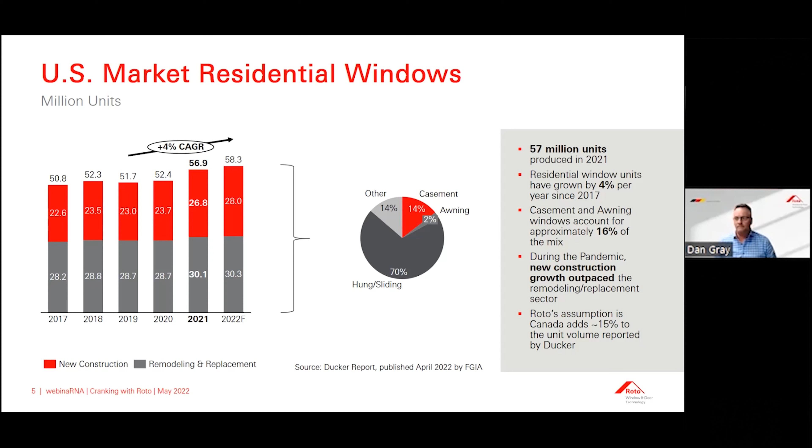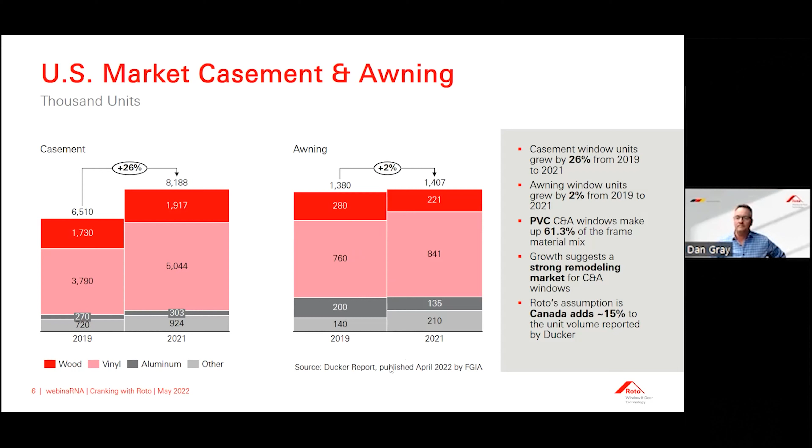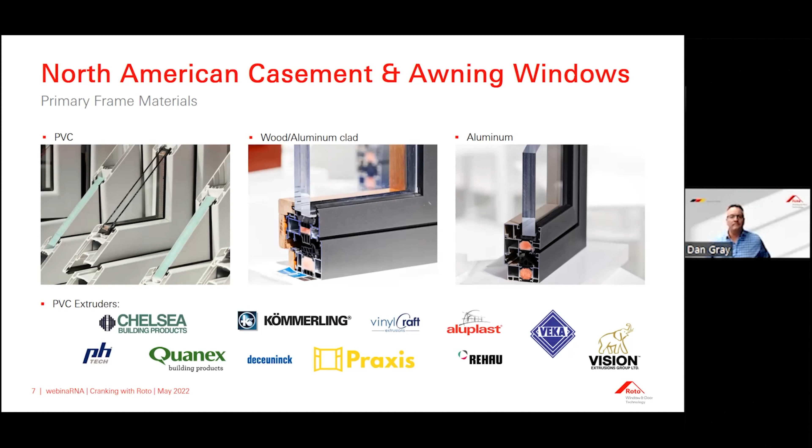First of all, as we know, taller, wider, and heavier casement and awning windows are the theme. These larger units require robust and innovative hardware solutions.

Energy performance standards are becoming much more rigorous today, which leads into an increase in triple glazing. All of this ties into size and weight of the units overall.

Even though the units are getting bigger, the ease of functionality remains. There's a lot of focus on ADA requirements to maintain operating forces at 5 pounds or less. This becomes a challenge for all parties.

The hardware is becoming more contemporary overall. Somewhat gone are the days of the rounded style of hardware. Now you see much more squared off right angles.

And tying in with that is the color palette. I think we've all experienced that black is really in today when you look at windows. And actually, even shades of brass and gold are making a huge comeback.

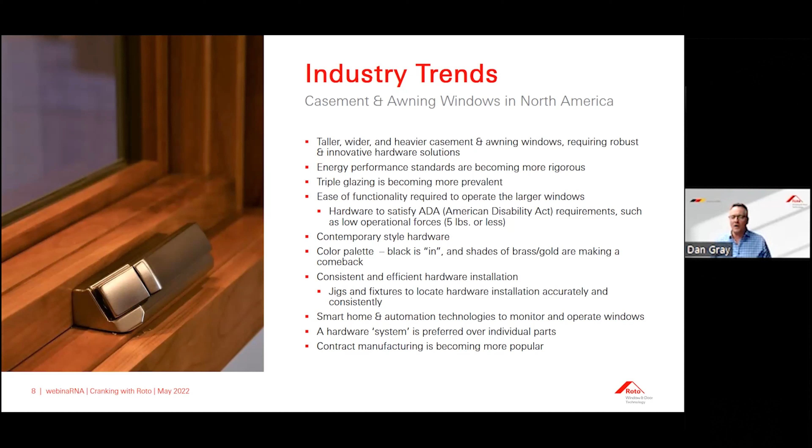Now we're going to take a look at Roto. Who is Roto overall? Parent company Roto Frank, founded in Stuttgart, Germany in 1935. Wilhelm Frank, the founder, invented the hardware to actuate a tilt and turn window.

In Europe, a tilt and turn window is analogous to our single and double hung windows here in North America. There is tremendous engineering and robust supply chain capacities and capabilities on a global scale within the Roto Group. We have some 14 manufacturing sites around the globe, strategically located.

We looked at the sliding patio door market segment throughout North America, and the Inowa hardware was a focus in that particular webinar. A recording of that can be seen also on Roto North America's YouTube channel.

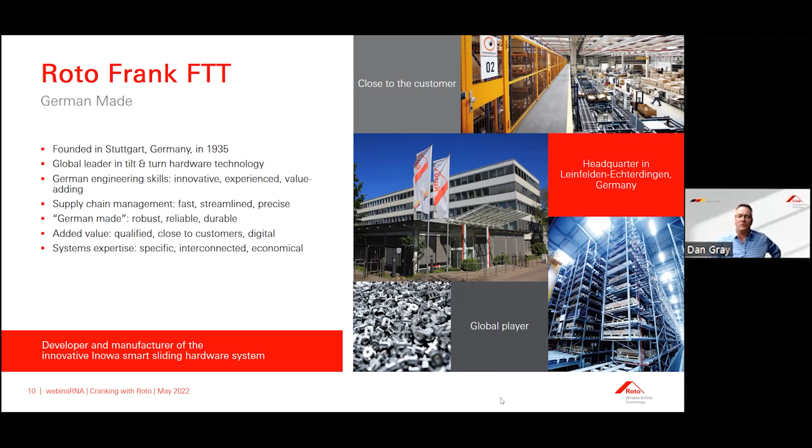Now let's hone in on Roto North America. We were founded here in North America in 1979 with our facility in Chester, Connecticut. Over the years, some evolution took place. And starting in about 2004, 2005, the primary focus became window and door hardware.

In 2012, we made a significant acquisition of Fasco die-cast metals in Mississauga, Canada. This came at a time when it cemented Roto's commitment to the North American market.

Today, we have three core product groups. First one is casement and awning, which we're going to talk a lot about today. The second, sliding patio door—again, that was the theme of our first webinar series in February.

And then tilt and turn windows and the entire Euro product category, which will be a focus item of an upcoming webinar series later this year. Overall, we strive to offer excellence in window and door hardware to our customers throughout the United States and Canada.

Let's take a look into our mission here in North America. We conduct regular surveys and discussions with our customers. We want to understand what our customers value for purchasing criteria when they make a determination who they're going to do business with.

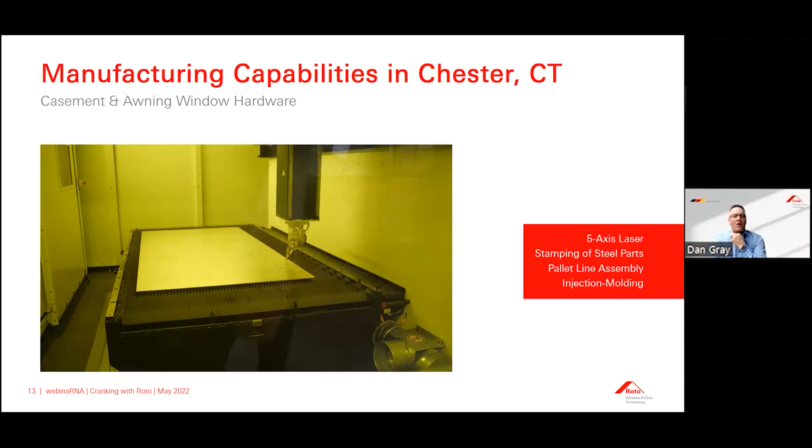First of all, this is one of our 5-axis lasers, cutting arms for our operators. Here we have a stamping machine, at this point cutting arms for our HGO5 hinge. This is one of our pallet lines where we're applying a silicone bead to our operator to connect the base and the cover.

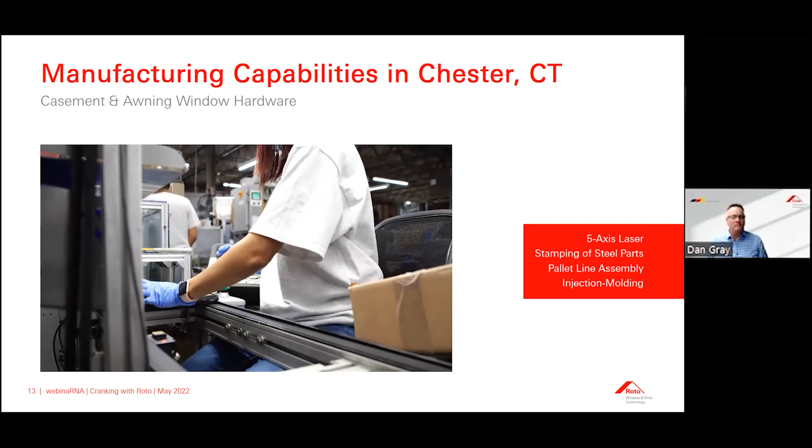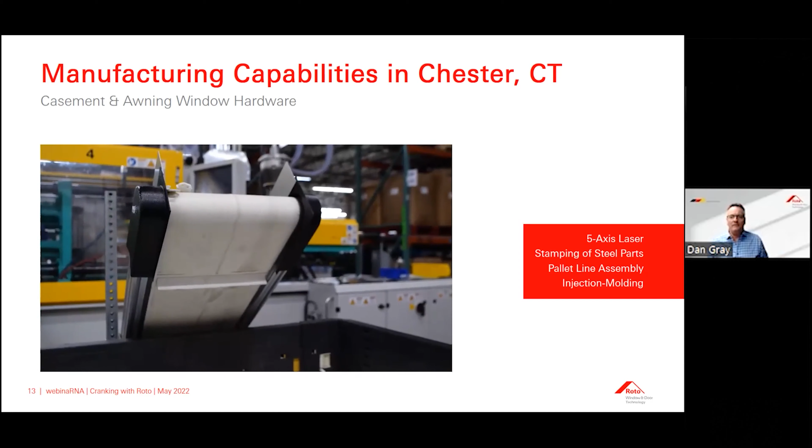Next, we do a fair amount of injection molded parts here. For example, all of the guide housings and the strikers for our casement program are done here. Our sash lifter, a popular device, is injection molded in-house. And then with our lock bars, after they've been powder coat painted, we do a flatness check to make sure the bowing does not exceed standard expectations of our customers. That's a quick snapshot of some of the manufacturing capabilities we have in Connecticut.

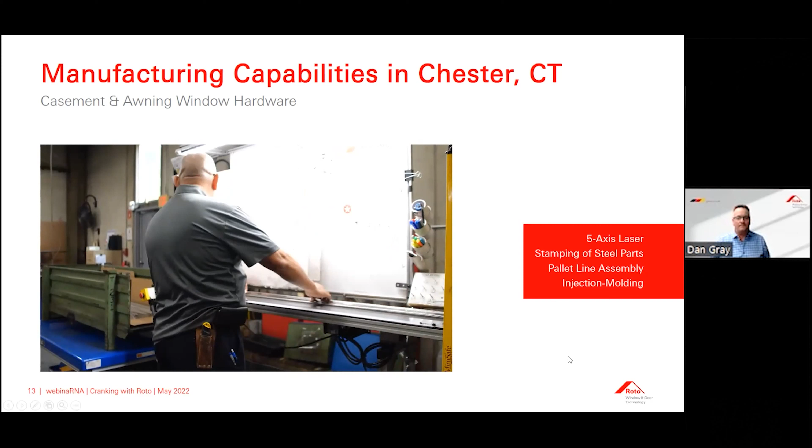Now we're going to shift a little bit and take a deeper look into some of the products that comprise our casement and awning portfolio. First of all, there's 3 subcategories, as I mentioned at the start. In order to optimize the fit, form, and function for a casement and awning window, putting these 3 subcategories in unison does tremendous benefit for the fabricator and their customers once the window is installed in the field.

First subcategory, or the engine if you will, are the operators. Roto has a myriad of operator styles that we'll take a closer look at. And the locking system—fantastic opportunity to separate one's window performance from their competition through the utilization of an optional part called the casement corner drive, which we'll look further into. Then finally, the hinges. Nobody really cares too much about the hinges until there's a problem; it tends to be an undervalued component within the hardware system. But we'll delve into some of the options we have on the hinge subcategory.

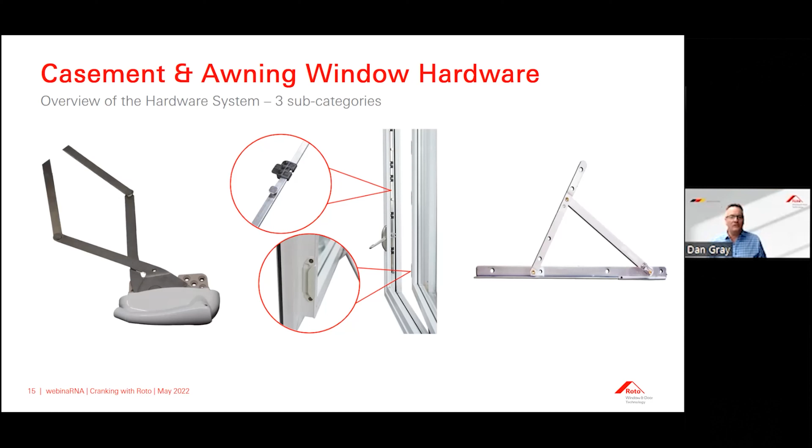So let's take a look at the xdrive OP06 operating system. This is our first generation operator. It was designed and began to be manufactured here in Connecticut in 2006. This is a very narrow footprint of an operator, and it's a fully sealed housing, so it does not require the addition of a cover cap. Yes, of course, you can add cover caps and multiple crank handles, as shown to the right, but the cover cap is not required, which gives a customer, perhaps one focused on new construction, the ability to have a just-right product.

The OP06 is available in cold roll steel or 300 series stainless steel for a complete coastal package. As I mentioned, the footprint is key here because the dimension left to right is probably the most narrow footprint in the industry. And there's dual fixing available where you can screw the operator down into the tower vertically and horizontally, and that provides the ultimate in security and stability in the functionality of that window.

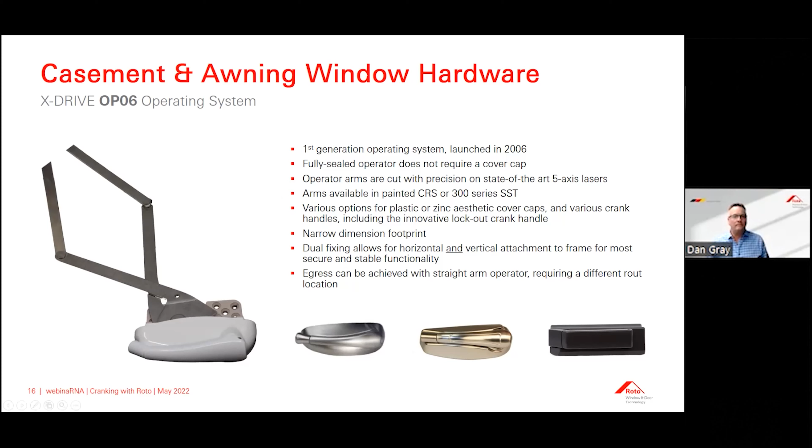Let's now take a look at our OP08E, which stands for Evolve. The OP08 was designed and implemented first in 2016. This was a direct development in relation to requests from many customers. This is a dimensional equivalent footprint to other operators in the marketplace. You can see here on the left that there is a skeletal base that requires the addition of a cover cap and, of course, then a crank handle.

An interesting feature here shows that the design has the gear basically facing down, and this prevents any buildup of dirt and dust from collecting in the gear teeth and helps prolong the effective functionality over time in the field. Very important design criteria here for the operator.

These operator arms are cut on the same 5-axis lasers as the OP06. These are a couple of the traditional and contemporary style cover caps and crank handles that are available, again similar to the OP06, available in cold roll steel and 300 series stainless.

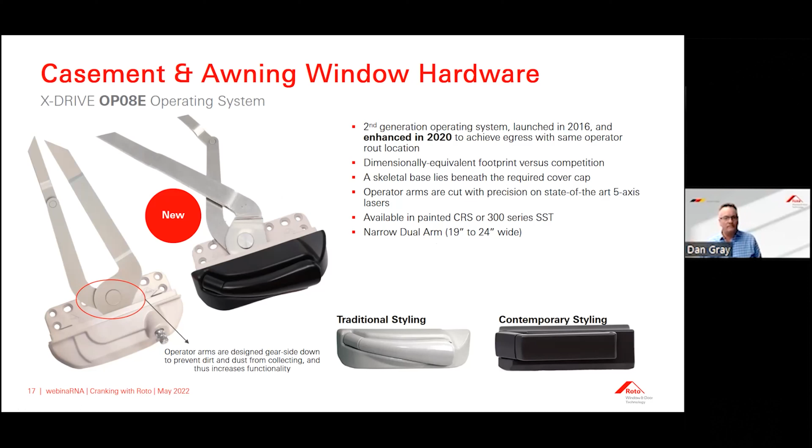Our newest operating system, the OP10. This is set to be launched later on this summer, perhaps August, maybe September time period. Again, driven by demand from a lot of our PVC fabricators who happen to also produce an aluminum casement window. This will be a face mount operator manufactured with the same precision laser cut arms as our OP06 and OP08.

Now the diagram here on the right-hand side compares and contrasts the styles. This is our OP08. You can see that has a base that extends through the tower of the window. The base is approximately 1/8 inch in height. Whereas you can see the new OP10 for aluminum profiles, because the cavity is so tight, we've eliminated that base, creating the surface mount attachment.

You can see here the backside schematic that there are 4 screw holes that allow the fastening to the frame. For enhanced stability, there will be a back plate available with the operator, and it will also come with an optional gasket for superior sealing. This OP10 will be available in split arm, single arm, and awning variants.

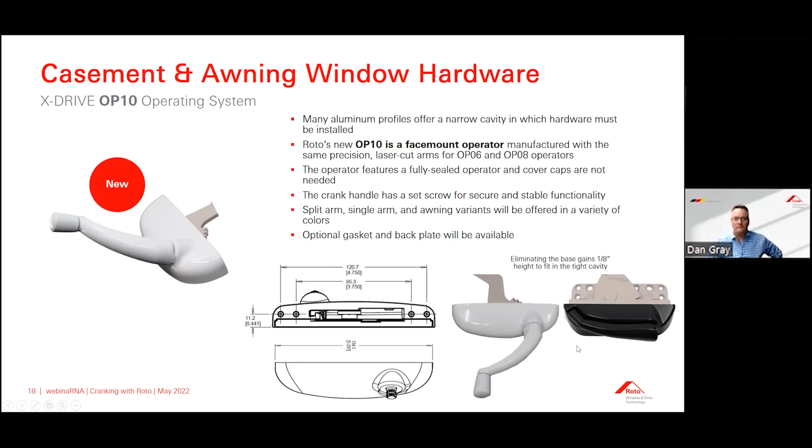Awning windows have become very popular for us at Roto, despite the fact, as shown early in the presentation, that market data suggests the growth of awnings over the last couple of years has been minimal. We've seen tremendous additional activity for this operator variant with our customer base.

We are just on the verge of launching a brand new bracket that will significantly upgrade the performance of the operator. This bracket will be much more intuitive to connect and disconnect, both on the fabrication floor and also in the field. This again comes from listening to our customers and taking the appropriate action to upgrade a specific part. This particular bracket will be made of stainless steel only. The screw attachment will create a very stable and a much enhanced strength of the part itself over the last generation bracket. Very excited about this new product.

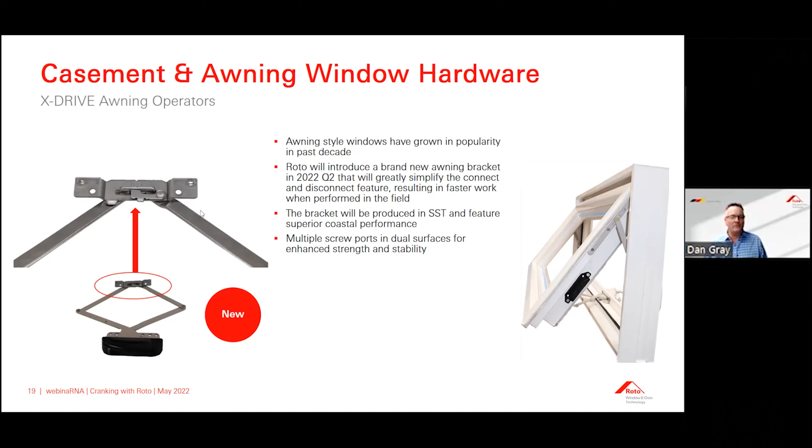Let's take a look at some unique crank handle options that we bring to the market. First two images are of our lockout crank handle. This is very innovative and patented.

Probably about 2015, 2016, we did a lot of research in the market. We took as many competitive crank handles that had a folding functionality to about 135 degrees and did some testing. It was found that almost every single handle wanted to collapse in your hand when you were cranking open or cranking close a sash. What we did is we designed a plunger on the back side of the handle that gives you an easy depression.

When the handle is in the open position, the plunger locks the handle open. It can't compress in your hand when you're cranking. Then when you depress the plunger, close down the handle, it's very intuitive from a functionality standpoint.

The other crank handle we want to talk a little bit about is the Easy Grip crank handle. This comes in very nice when a fabricator has an ADA application that you're looking to satisfy. It has a very large knob on the end of the crank and provides easier access and easier functionality of the cranking mode.

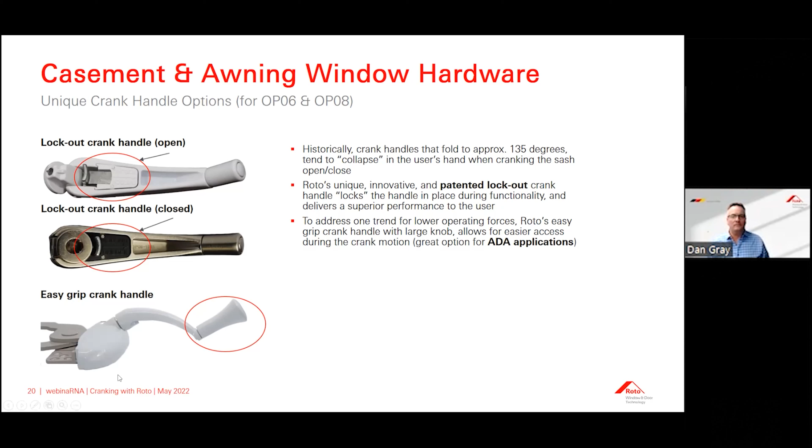Locking system, something we do extremely well here at Roto, I will say, and a very important subcategory of the casement and awning mix. Our lock bars come with the guide housings pre-installed. We have lock points that are adjustable, cold roll steel, stainless steel, an array of configurations for fit, form, and function in multiple profile systems.

The corner drive, which I'm going to show you in a very brief video, is a tremendous opportunity for a fabricator to separate themselves from their competition. It could enhance product performance. It could enhance marketing performance. It can simply create differentiation for you.

Let's take a quick look at the functionality of the lock bar and then the corner drive system. See the very standard operation of the lock handle. As you go up the window, you can see how the bar glides between the guide housings and then attaches to our corner drive.

You can see here there's a connecting link arm that attaches to the top lock point of your lock bar, then onto the corner drive itself. And it creates a lock point about 4 inches from the top of the window consistently.

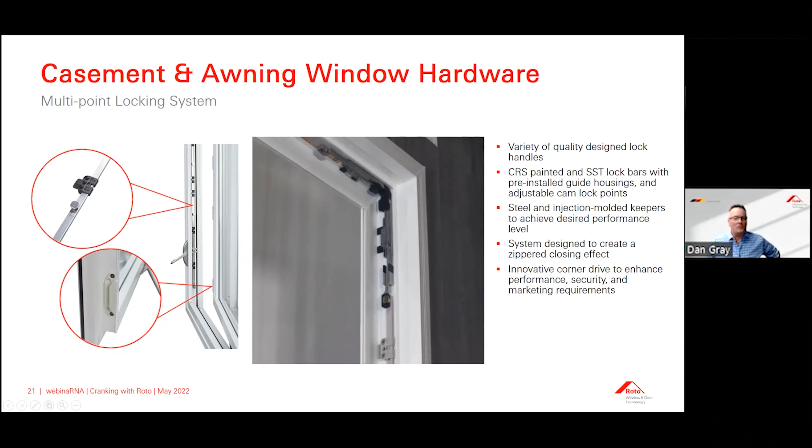Let's take a look at some of the lock handles we have available, really 4 today. The LH15 is our lock handle for wood windows. Due to the intricate design of a wood window, the lock handle needs to be designed differently overall than the handles for your PVC and aluminum windows.

LH08 is our tried and true lock handle. This has been in the market since 2006. Some customers still use it today, absolutely love it. It's a great performing handle.

We launched the LH19 about 2.5, 3 years ago. This particular handle is more contemporary in design, and the fork system is being upgraded to include a zinc material versus the current composite.

LH20 is our newest lock handle to the lineup. This is, again, listening to the trends in the market and feedback from customers. There is a desire for a low profile lock handle. Now, what does low profile mean exactly?

I know this is an eye test, but I'll just highlight one number. The low profile lock handle, or LH20, stands about 11 millimeters proud off the frame, as compared to almost 21 millimeter and 22 for the LH19 and the LH08.

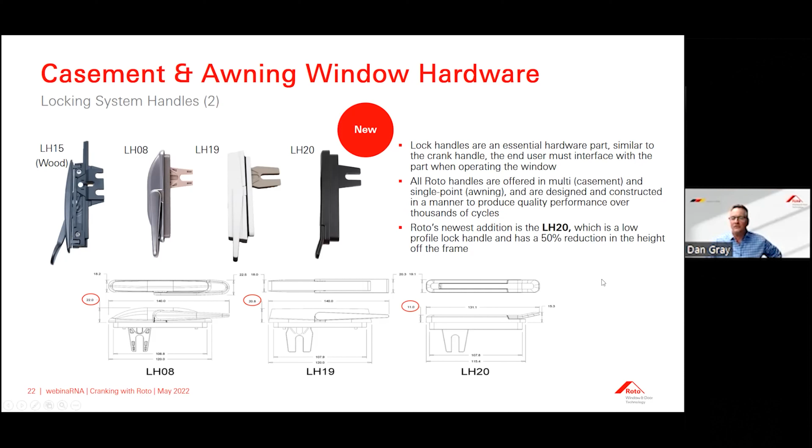Moving on to this slide is 2-bar hinges. As Dan mentioned, the hinge is one of the 3 main parts to a casement and awning window. It basically establishes the movable connection between the frame and sash.

Roto offers many different variants in the HG06 family, including standard, heavy duty, and supreme. The CRS painted and stainless steel, 300 series stainless steel. The 10-inch and 14-inch are standard. The 14-inch is heavy duty, and the 14-inch is also supreme, only available in stainless steel.

All hinge variants are available in washability and egress variants. Friction variants are also available in different sizes, 14 inches up to 22 inches. The HG06 has a proven history of reliability and superior performance.

All HG06s, all tracks, offer a built-in flare feature that acts as a lead-in for the hinge arm shoe. This may seem like a trivial feature, but it's actually pretty innovative. It has a big impact on the manufacturer and saves time in the end when you try to marry the frame to the sash. We're all about saving time and money for the customer.

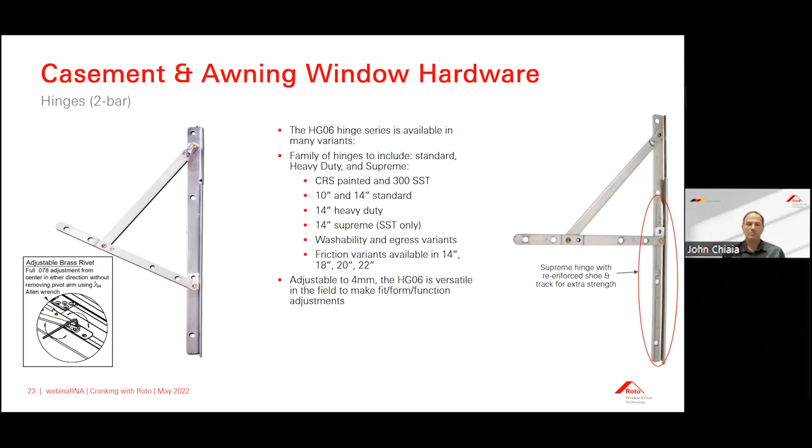This particular slide shows the difference between washability and egress. More times than not, this creates a lot of confusion and people don't really understand the difference. Well, this picture pretty much is worth 1,000 words. This basically shows the difference.

In essence, the washability hinge variant slides and pivots. The end result when the sash is fully open allows the homeowner to wash the exterior of the window from inside the house. That's shown on the left.

Off to the right is the egress window. Basically, this hinge mainly just pivots so that the end result when the sash is fully open creates a wider or greater net clear opening for the homeowner. This is especially important when trying to meet egress codes, not only in the US, but also Canada. Basically wanted to share this and explain that Roto offers hinge variants for both options.

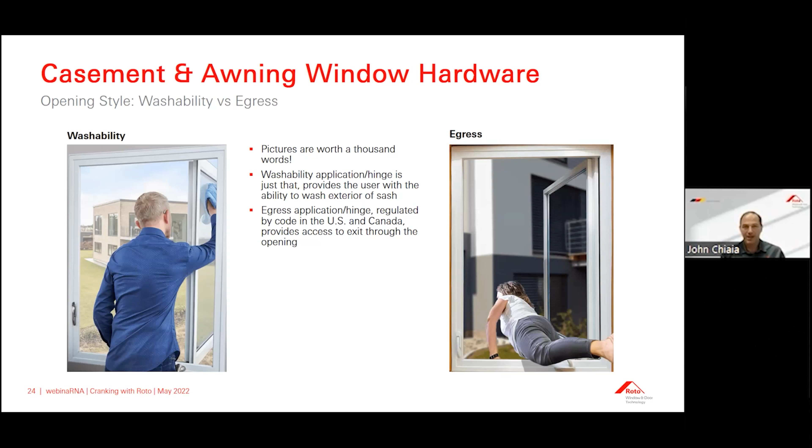Continuing on with hinges, this shows our 4-bar hinge. This is a fairly new program for us out of Germany. It's an expanding hinge program used mainly in commercial applications. These hinges can support sash weights up to 400 pounds. They're only available in a 16 millimeter nominal stack height, which is the industry standard for aluminum commercial windows. They're also available in lengths from 8 inches all the way up to 26 inches long.

Also available with this program is a commonly used restrictor or limit device, as shown in the picture to the left.

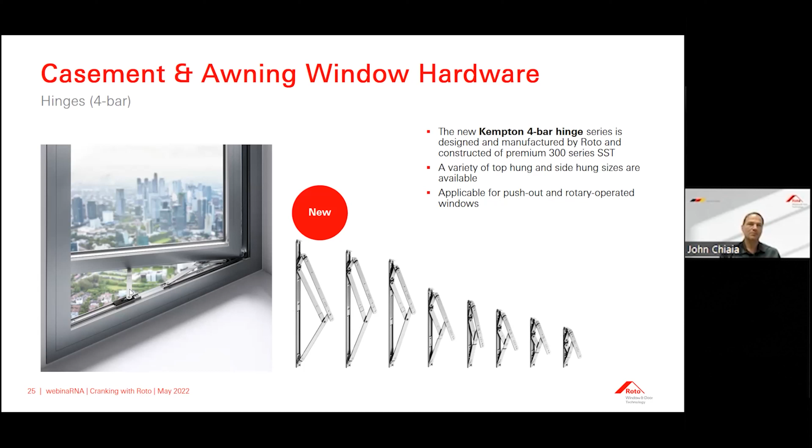Moving on with the hinge theme, what you see here is a unique and growing application which we call the hybrid casement. As Dan mentioned earlier, windows are getting bigger and heavier. This particular application combines European heritage and innovation along with North American window technology. The effective result is a fast action, smooth operating system. This can open and close a window with as little as 7 turns of the crank handle.

The sash can be opened a full 90 degrees and it can be limited with restrictors. It's a concealed hinge, much like our other hinges. The advantage with this hinge is it offers adjustability in 3 directions: horizontally or laterally, vertically or height-wise, and outward and inward, being able to adjust the sash compression, all of which none of the other hinges can do.

Also, because it's not as long as other hinges, it offers more clearance with our straight arm operators. This allows the hardware cavity to be more compact, so that the sight line is smaller, creating a greater viewing experience.

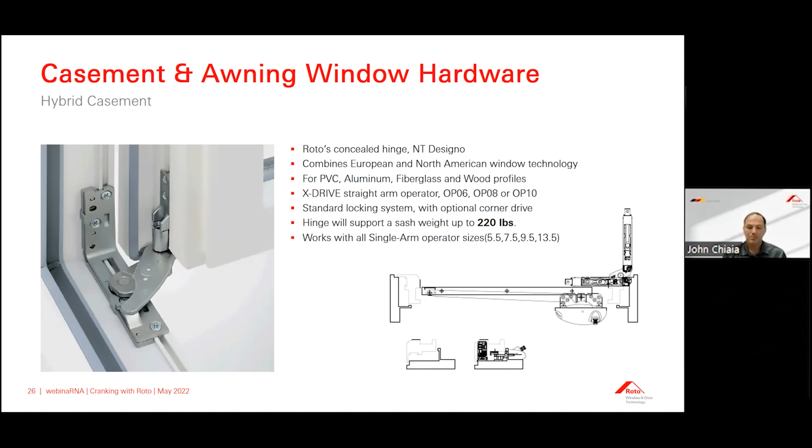This particular slide we wanted to share with you, as Dan mentioned, the growing trend is darker colors. What you see here is us experimenting and exploring the idea of products with different colors. For example, you see the bronze cover cap with the dark colored crank handle. Same with the lock handle. This is a growing trend and certainly something we are exploring.

There's a demand out there, and certainly the good thing is that with Roto's flexibility within our processes and products, we're able to constitute custom color options to satisfy market trends. So basically, we have a lot of control over what we can and can't do. We wanted to share this with you just to get some feedback on your thoughts, not only for the aesthetic components, but also beyond that, the connecting parts, the arms, the operator arms, the hinge arms, the lock bar, etc. Wanted to get some input and feedback on whether or not the dark color is the new trending color.

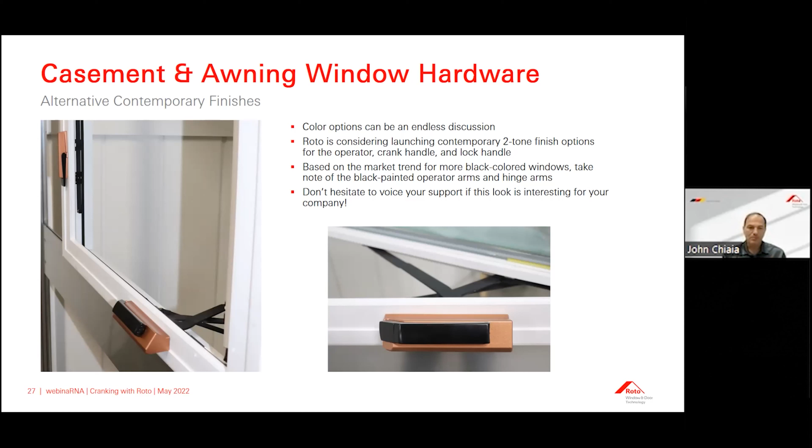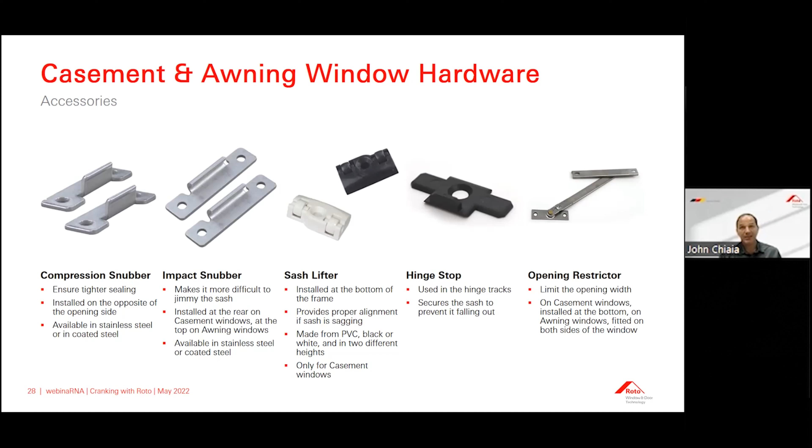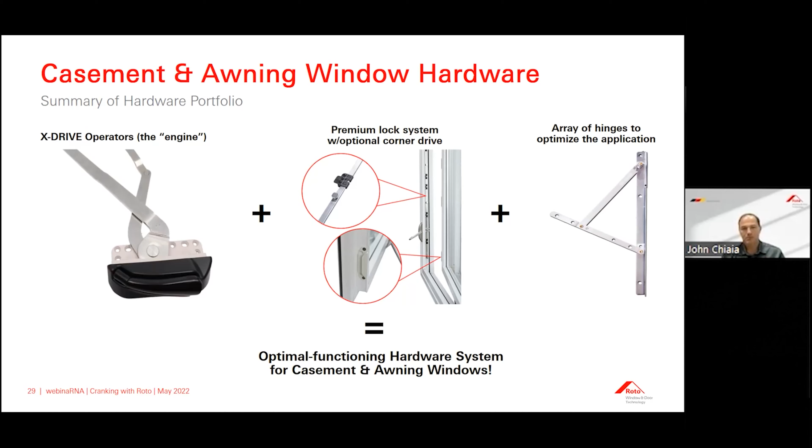Next, I'd like to talk a little bit about our services that we offer. To complement Roto's high quality products, we also offer high quality services. So let's talk a little bit about application support.

From the very start of an opportunity to completion and beyond, we interface closely with our customers and extruder partners. We provide valuable hardware solutions to meet customer needs. We also want to understand their goals so that we don't over specify or under specify products. With over 24 variants of lock bar guides and strikers, we will find the perfect combination for the profile.

Number 3, we provide timely technical support via phone, email, Zoom, or in person. This ties into the 6 key buying criteria, as Dan mentioned earlier. This is actually number 4, response time, and number 6, technical support.

We don't just specify hardware or come up with hardware solutions. We actually qualify them. We apply the solutions to sample windows in order to qualify the application. This is actually very important because a lot of times what you see on paper doesn't actually always represent what you see in person. So this is really big.

Beyond that, we conduct on-site customer visits to support customer conversion process, not only for new conversions, but if you wanted to change or transition to a different part, we will be there to support that. We provide installation training, again, on-site or remotely. We troubleshoot existing applications, and we perform application technical analysis to ensure best practices.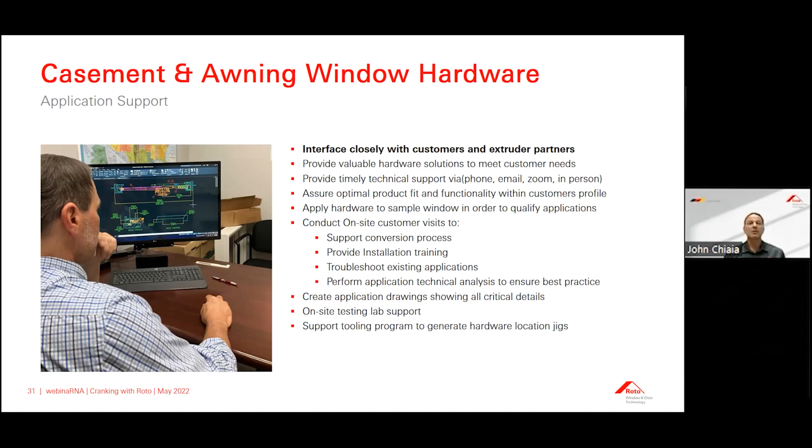We also offer on-site testing and lab support. If you're sending your window out to be certified at a lab, we will, upon request, certainly attend that test and support it should something go wrong. Beyond that, we also offer a tooling program, and we support this through our application program because they tie together.

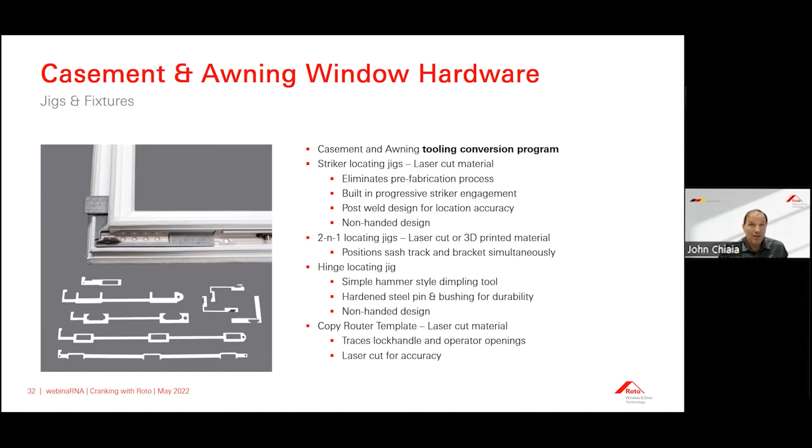Testing. We take testing very seriously, and we test all new products before hitting the market.

check existing products to make sure that everything is in order. These cycle testers can be modified or altered to test other products. For example, we're developing a new hung product, so we're actually going to cycle test on this as well. So we have a fully staffed and fully equipped testing lab.

We also do first piece inspections daily. Basically, within the course of a day, if you walk out to the factory, you'll see that at any given time, we're testing or inspecting every order that comes to our building. Not only customer orders, but also incoming parts. And Roto has the ability to test customers' windows should they need some sort of custom test.

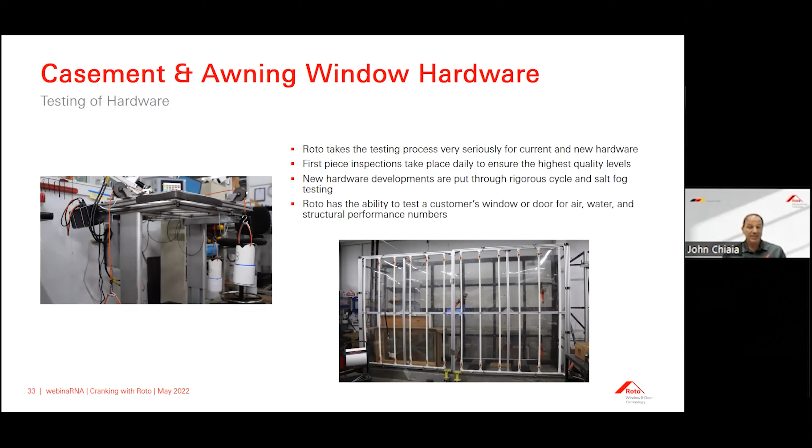We also conduct hardware load tests. All of this is done in-house. This also provides the data we need to understand our hardware combinations and limitations.

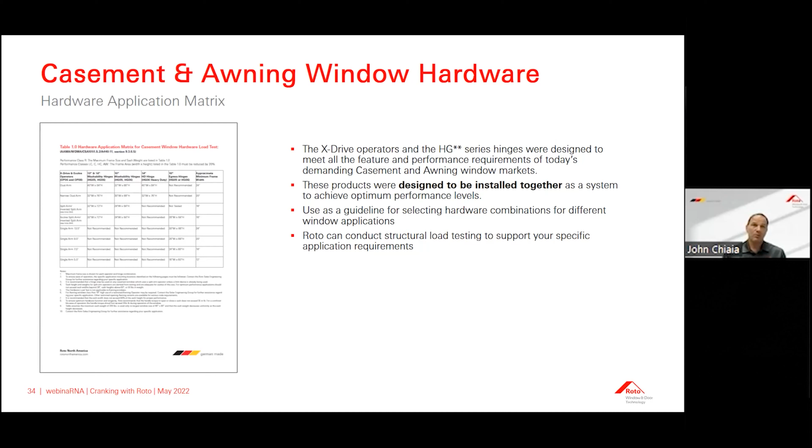Finally, contract manufacturing. This is also a trending and growing program that we offer. Many window and door manufacturers desire to create a unique or custom look, and one way to do so is via aesthetics and hardware. Whether it's a logo, a color, or a brand new piece of hardware, rather than invest in their own manufacturing resources to build the unique hardware, customers can come to us, and they can lean on us from the start to the end and in between to manage all of the processes needed to develop a new product. Again, we utilize our resources and manufacturing capabilities.

And Roto does have a vast global network of manufacturing capabilities. I encourage any customer interested in this to take part in this program.